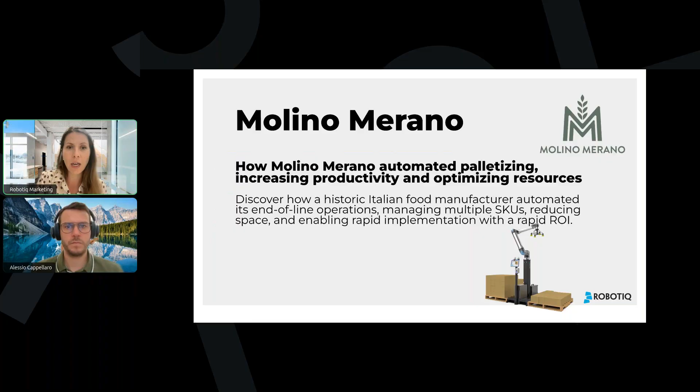Yeah. So ready, everyone? If we have Italians on the line, I would love a thumbs up as well. But if we have Italy lovers, it's also okay to share a thumbs up.

So let's travel to northern Italy, in the beautiful mountain region where this premium flour producer, Molino Merano, focuses on quality, tradition, and operational excellence. They're located in Merano in Trentino Alto Adige, a famous region in the north of Italy. It's a company founded in 1985, with year-round production, up to 200 employees and a large variety of products: cereals, flour, quinoa, polenta, many types of derivative products from flour.

So again, you might recognize yourself if your production line contains diverse SKUs, diverse types of boxes, diverse weights, and this is where they had a specific challenge. So Alessio, talk to us a little bit about how this project started and what was their main challenge. Yes, thank you very much, Eli, for the introduction. I met the customer Molino Merano during the exhibition last year at IPACK-IMA in May. We had a discussion during the show. They saw our palletizer and they explained to us their needs and their pain points.

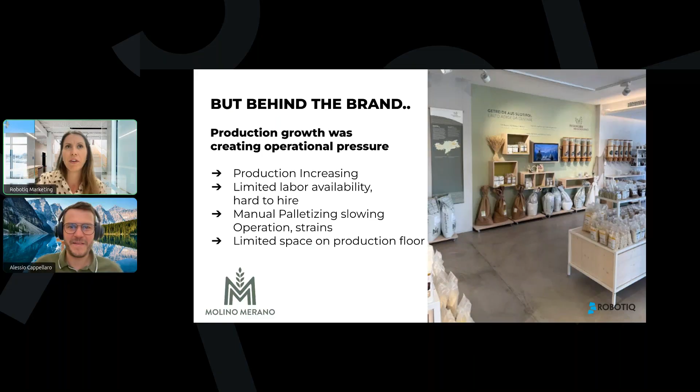Very good. Thanks, Alessio. Yeah, cool. And still a bit more about their team. Yeah.

Yes, correct. They needed a practical automation partner, because they had very clear in mind what they wanted to do. They wanted a fast solution and a fast deployment. So they didn't come to the exhibition with a long project, but they came with a focused idea. They knew what they wanted, and in particular they wanted something that was faster to develop, faster not only to install but also to develop all the projects together.

Something that was standard, but also easy and flexible to use, flexible for their space and easy to use for their operators that use it every day. And of course, since they are producing a lot and they are running multiple shifts for some part of the year, they wanted a very reliable solution that can last in time and that can bring added value to the company.

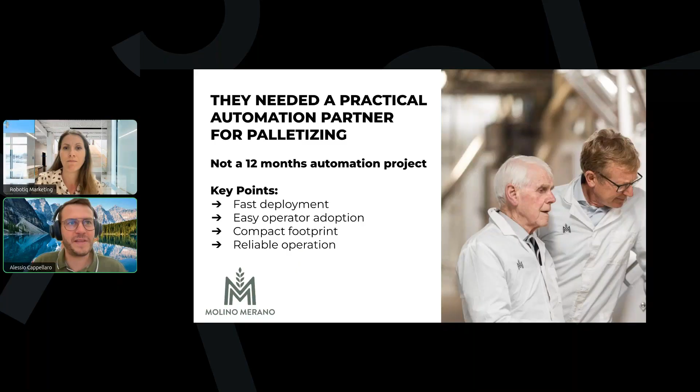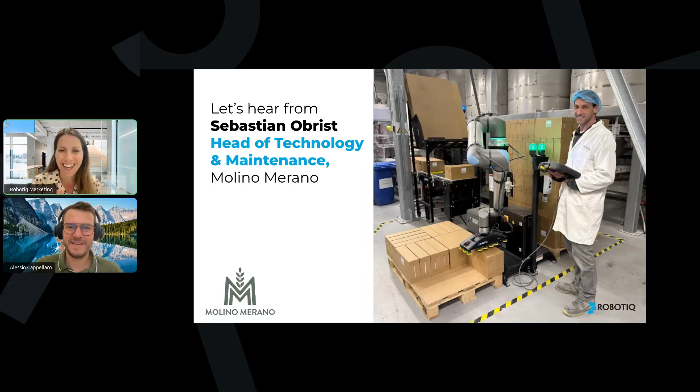Yes. Thanks, Alessio. I think quite some people can recognize themselves in this situation. So let's hear from Sebastian Obrist, head of technology and maintenance at Molino Merano. If anyone wants to practice their Italian in the next video, we have the subtitles in English, but you'll be able to hear a bit of the accent. So I wish you happy listening for a 2-minute interview.

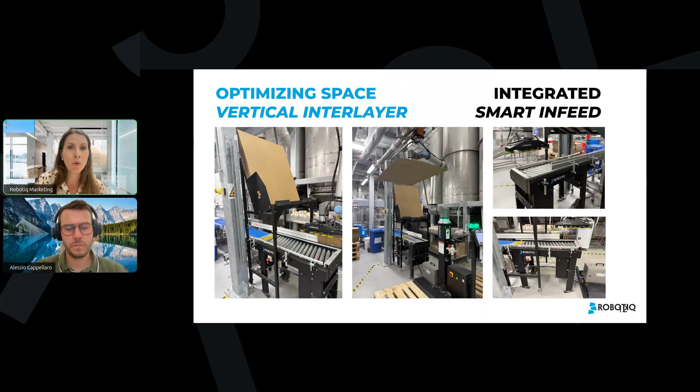So they are adding the Smart Infeed to their existing line, just a piece of smart conveyor. We call it Smart Infeed at Robotiq. But this piece of conveyor makes it way easier for you to manage different SKUs and new pallet patterns, new box types, making sure it's always easy for your team to program and reprogram it afterwards. Correct. Yes.

And another key result that we developed together with Molino is that we found a way to use collaborative mode 100%. As you probably saw in the video and can see in the picture, we are not putting any fences, and also no scanner in the palletizing cell. This means we are working 100% in collaborative mode, and while you are palletizing, you can change the pallet. As we can see here in the picture, we can palletize while the operator is changing the pallet.

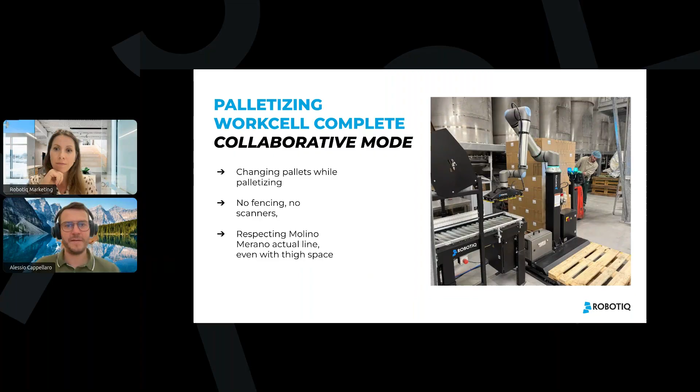This allows you to never stop production. Your palletizer is always working and is never stopped. And this allows Molino Merano to maintain high productivity, to maintain a very compact layout, and to work, as I mentioned before, in a collaborative way. Exactly. So very interesting, to be able to realize this in such a tight environment.

Yeah, and we are installing more and more collaborative solutions in Italy, but not only in Italy. This means that if we sit down together with the customer, we can use our standard palletizer and standard modules to find your solution, also if you need to go collaborative, if you need to change pallets while you are palletizing. And here, I think, is the most important slide, the early results.

We installed the palletizer, I think, 7 or 8 months ago, and we can see that they increased their production. They managed to use 100% of the productivity of the machine before the palletizer. They work in shifts, not always, but when they have peaks, like at Christmas or before summer, they need to produce more. This means they need to work in 2 shifts, and in the past they had to hire people from outside, from an external labor force.

And with this solution, they can prevent that, so they can have a faster ROI. And during the negotiation with Sebastian, we sat down together and found out that for Molino they will have an ROI that will be around 14 months. That is quite a good result for a company that works 1.5 shifts per day.

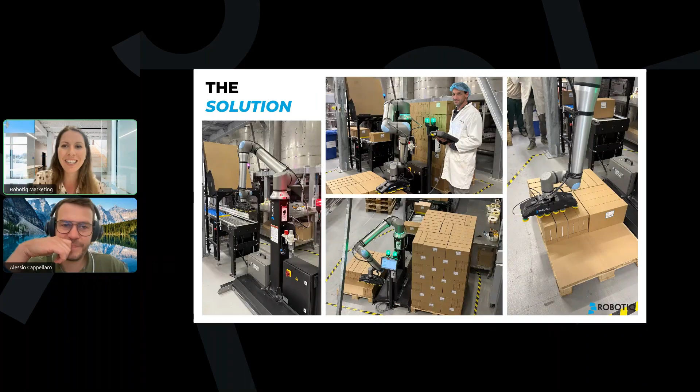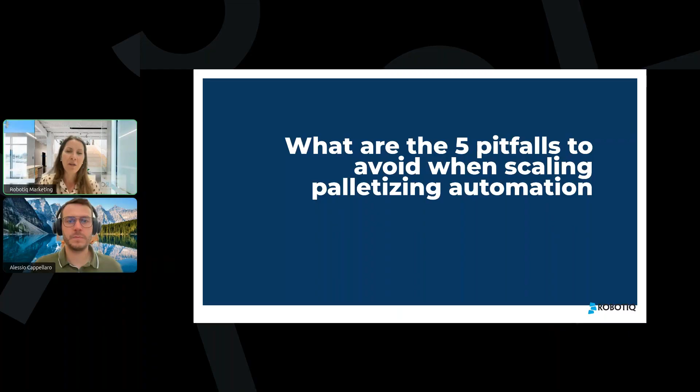Great. Thank you for sharing all about this project. You might have heard, everybody on the line, they say Italians do it better. Is it the case in palletizing, Alessio? So we're going to go over the 5 pitfalls to avoid when scaling palletizing automation related to the Molino Merano project. No, it's not only thanks to the Italians. Sorry, Alessio.

It's thanks to the close to 1,000 palletizing units installed in production worldwide, with more than 300 units just last year. So what can we learn from this? We see pictures of bottling, wine, food, consumer goods, pharma products. Mainly these 3 industries are our main focus where we've deployed all our skill set. We're going to go over these 5 pitfalls, and feel free to share in the chat if you have any other pitfall we should keep in mind.

So the first thing to avoid, of course, is to overestimate installation complexity. Some people will see an automation project with many months of deployment, many months of lead time, and a lot of investment. It's totally a myth. The reality is, in that case, the material arrives, it's installed in a day. The second day is the programming, and the third day is the training. And sometimes it can be done even on the second day. So we're talking about days if we have a standardized solution.

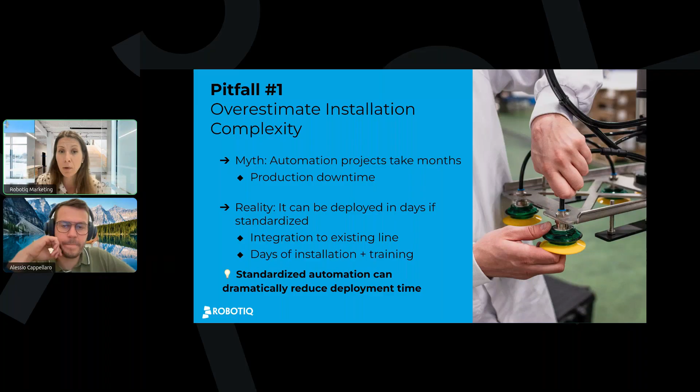That's really what we believe in at Robotiq. So integrated to the existing line, no change of your production floor. And of course, as I said, days of installation and training. So make sure you focus on a standardized automation that can dramatically reduce the deployment time. Next one, Alessio, up to you. Correct. Thank you, Eli.

So the pitfall number 2 that we identify is to design only with the perfect conditions. As we saw in the case study of Molino Merano, which we also see here in another very interesting picture, the real production environment is different than the computer world or the simulation. We have tight spaces, we have ceiling limits, we have beams, as here. We have layout constraints, we have existing equipment to respect, and other equipment to stay at a certain distance.

So it's not that the customer layout has to adapt to the palletizing solution, but the palletizing solution that has to adapt to the customer's space, availability and constraints. So we have to be able to adapt to real conditions, and we have to have hardware that is standard, but at the same time flexible, with software that can adapt to the space and constraints. Here we have, I think, a video coming up. If you click, Eli, thank you.

We can see here that we have a special feature of our software that allows you, if you have a column like we have here in Molino Merano, to put it in your layout, and automatically the algorithm will calculate the trajectory in order to avoid the column, as we can see in the video. The key is that the operator does not have to program the trajectory; you just have to draw your constraint, and the palletizer automatically calculates the robot trajectory.

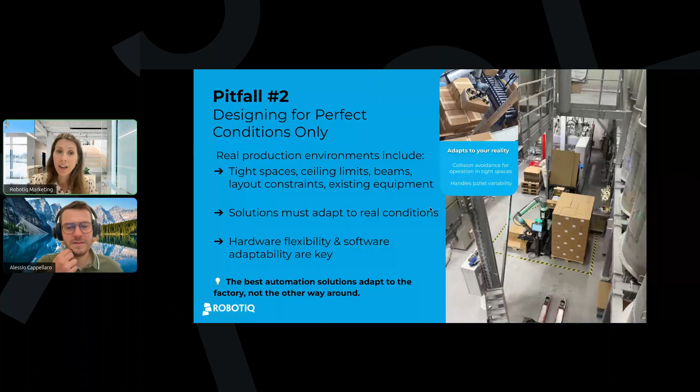Yeah. Exactly. Thanks, Alessio. Definitely. So nothing to teach point by point or have an external engineering team to plan the programming for you. It's all done automatically with the software. So that comes to our third pitfall, and makes a good link. Not planning for variability from the beginning can be a mistake.

So if you go with either a traditional solution or something very complex in training, you have to take that into consideration. Food manufacturers, but also other consumer goods manufacturers, pharma, you often produce multiple SKUs, multiple box sizes, new pallet patterns all the time. Just think of food manufacturers: at Christmas time, there are these new types of boxes. You have a new customer with specific requests for box shapes.

So you need to be able to do that, and you don't want to have to call your external team every time. You want your operators to be able to deploy this, and this is what a standardized and easy to use solution will provide you. So flexible programming allows you to plan for change from day one, as I said. Flexible automation helps manufacturers scale sustainably as production evolves.

We have customers, for example, I'm thinking about Cascade Coffee. Some people might have heard of them already. They have more than 400 SKUs, and it's changing all the time. Recently, they've opened up to the Asian market. They didn't have to talk to us about it. We discussed with them again recently, and they said, hey, we've just added 100 more SKUs. We're there to support the optimization, but it's all something you can do on your own.

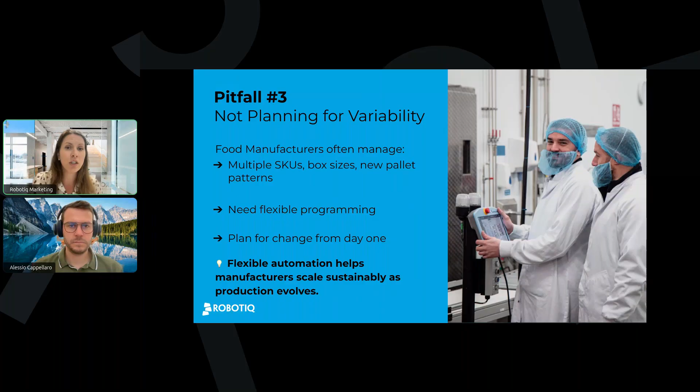Right, and yeah, flexibility, as you mentioned, Eli, but also it's very important to keep it simple. Sometimes customers that want to automate think that they have to automate the most complex task. But the key that we saw in our 950 installations is that it's better to start simple and then increase and scale.

And it's very important also not to overcomplicate things, and to start with the automation that has a clear and proven payback. So the ROI is very important, in particular for the customers, the owners of companies, they know it. And we've seen a lot of times installations with very expensive lines producing food or pharma, and then in the end, the palletizing is still manual and is the bottleneck. So sometimes automating the most simple operation, that is palletizing, is the key for a clear and efficient success, also in terms of ROI.

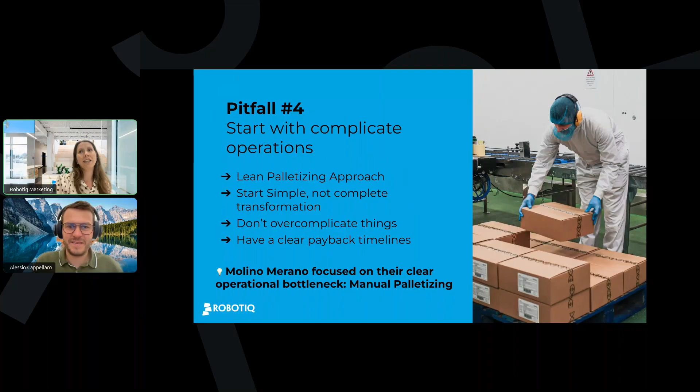So again, the last pitfall to avoid: choosing an overly complex solution. Automation should be simple, and that's our way to do it. Alessio is going to talk about the lean robotics approach here at Robotiq. That's what we follow every day. Over-customization slows deployment. Complex systems are harder to maintain. So focusing on scalability here is important: having a standard solution that delivers fast value, focusing on simplicity and reliability from day to day.

And this last point for me is important, and that's what we hear the most: the operators are owning the solution. So we see here a project, I've already talked about it, so I know some people on the line are there every webinar. We talked about this project called Pan Voila. They are a bread and cake manufacturer, and it was very interesting.

I've been there on site to film and photograph the case study, and the owner was like, usually it takes me 3 months to deploy a new automation project, and I have to train the people every week until after the 3 months they're up to speed. In that case, 2 weeks later, it was the operators that were teaching me how to bring in the new SKU, implement the new box size, whatsoever. So they were learning very fast and owning the solution after just a couple of days. So ease of use and reliability create more value than customization.

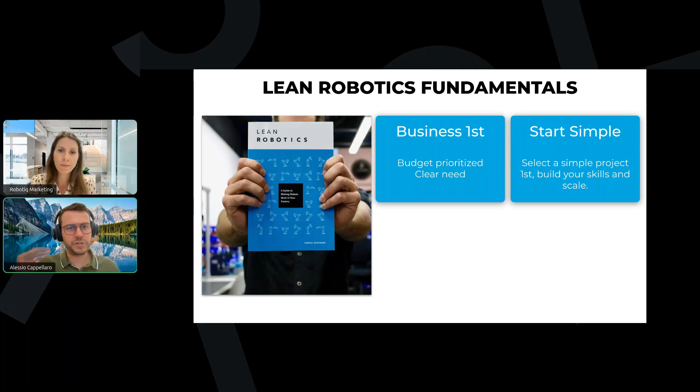Where do we start? So yes, we have a great experience that we call the Lean Palletizing experience, and we have a book written by our CEO Samuel with the fundamentals of Lean Robotics. So first, it's very important to identify the business case. We mentioned the ROI a lot of times. We need to sit down with the customer and make sure the project will bring a clear return on investment. We start simple. As we mentioned in the Molino Merano case, select a simple project first, build your skills, and then scale. So start simple and then grow in complexity.

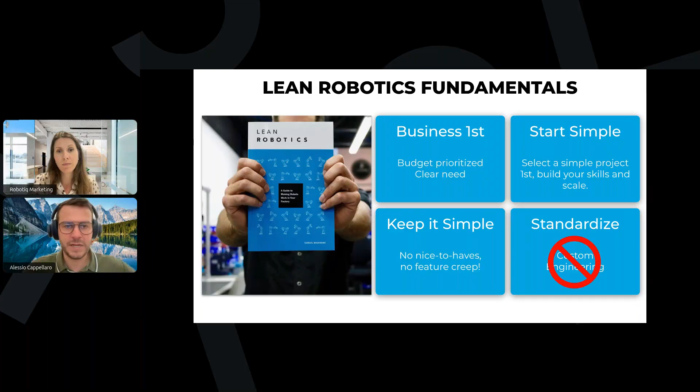Then the third fundamental is start simple, but also keep it simple. So we want you to take advantage of our palletizer as fast as possible. We want a fast installation, and we want you to take the benefit of it starting from the first day of the installation. And don't focus on custom engineering, but make it standard. I think one of the strengths of Robotiq is that we standardized a product that was custom before; now it is standard. So when we also have to adapt to difficult customer conditions, we always use our standard modules.

In the slide that Elizabeth is showing here, we can see how we can support the customer in all his journey, from the selection of the right palletizer till the installation and then the scale. Let's have a look at how we can do that.

We have a very great tool called Fit Check that allows you to check which is the best solution for you. Is your application compatible with our palletizer? Which is the best palletizer solution and option that we can offer to you? With this software, you are guided from the beginning to the end to have a clear answer, also in terms of ROI. So from the first step, then we can simulate together with you.

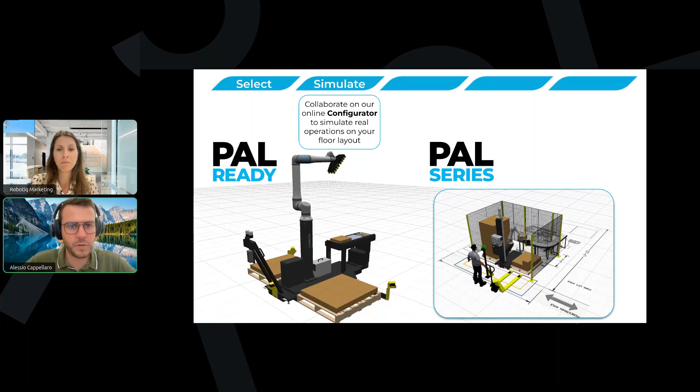We have, in my opinion, a very good and advanced software that allows you to put your layout, your footprint, some constraints, and from the first moment you have an idea of what your production rate will be, what your space will be, so you can do all these considerations and pre-analysis with a very simple software, starting from the first moment you are evaluating the palletizer.

Of course, Robotiq is a worldwide company, and we have support all around the world. We have partners covering all of our territories in Italy, Spain, but also in all of Europe, America and Asia Pacific. You can contact one of our partner experts and see our palletizer in their facility.

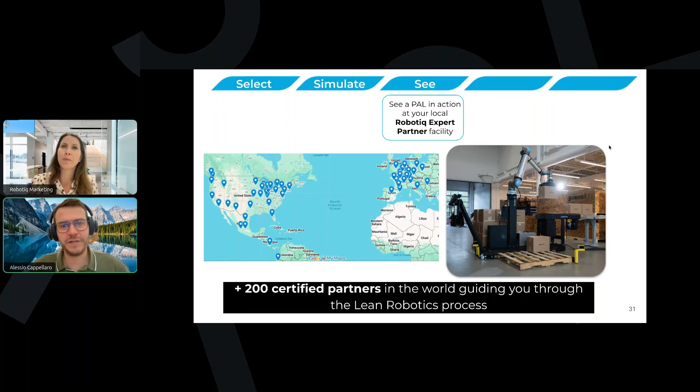Then, of course, we support you not only to install, but to install and train your operators and start to work with our palletizer, and we make you able to scale. Since it is a standard solution, it is easy to scale and to deploy in all the lines that you have available, with the focus to maintain a high ROI and a flexible and adaptable solution.

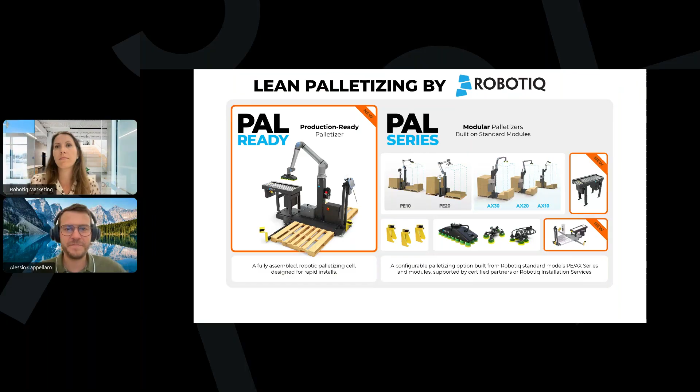As we saw before, the software is very easy to use, and it is also very easy to switch from one program to another. We have two different product lines. The first one is the PAL Ready, and as the name says, it is a palletizer ready for production. It's standard, ready to be connected to your production line. And then we have the PAL series: when you have specific needs, we can combine our standard modules together to create the perfect solution for your needs. I think we have a good video now to see our Ready and how fast and easy it is to install.

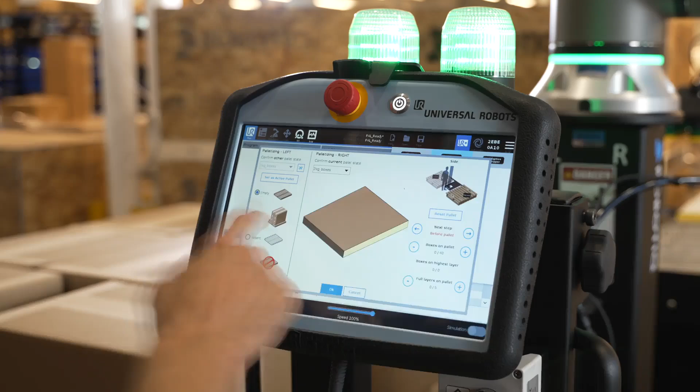Very good. Yeah. Sorry for the sound. We know it's a little heavy. We cannot control the sound that is going out. Sorry for that. But yeah, thank you.

And here we saw how easy to install and how standard our palletizer is, but at the same time how flexible and how easy to program it is. So I think it's a very good video to show you all what Robotiq can offer in terms of palletizers.

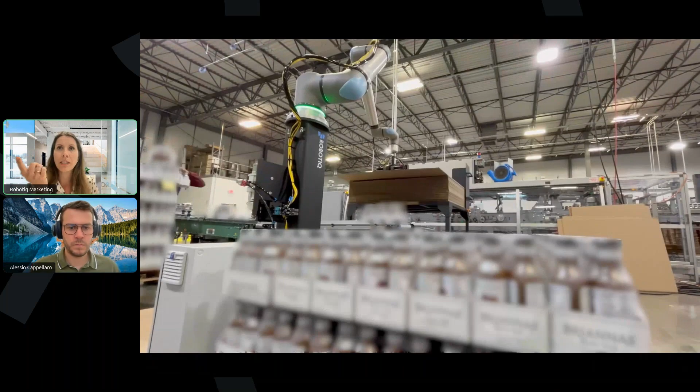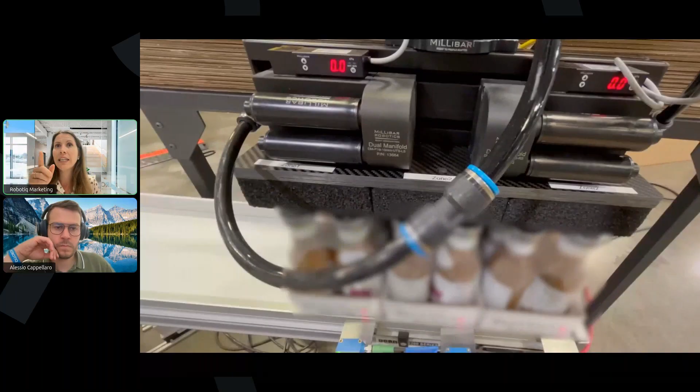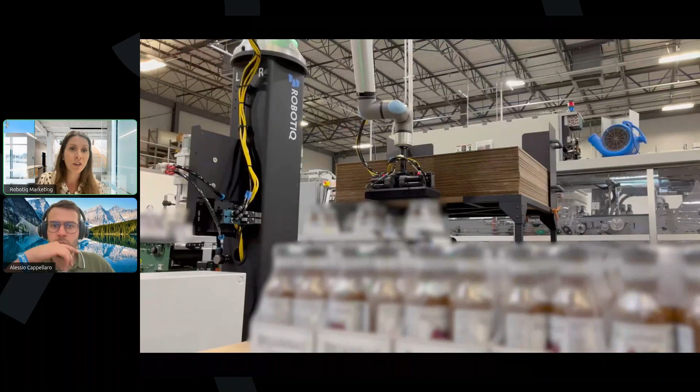So interlayer is involved. And yes, Russell, the question was 3 picks per minute, 3 picks at a time for that case. So you see here we have a custom foam gripper that was designed by our team to ensure that we are reaching the cycle time that the customer needed. So yes, multi-pick is possible, whether with our standard solution or with our custom gripping system. Anything to add, Alessio? I think you make it very clear.

We have a lot of installations of multi-pick, in particular also in the coffee world, when you are working with coffee cups that are very light boxes, and we can double pick and eventually also triple pick to use this collaborative palletizer also in very fast lines. Exactly. Thank you, Alessio.

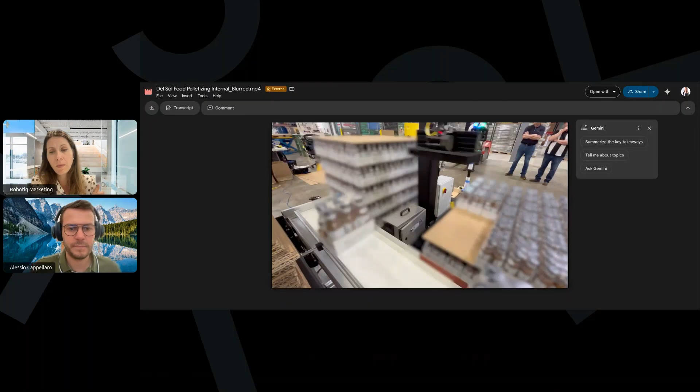And Max, I'm coming to your question. It's true that I forgot the second part of your question. So can it be trained to unload a pallet onto a conveyor belt? Do you want to take that one, Alessio? So I guess that would be depalletizing. Yes, the answer is yes. We can do that. We did that. Maybe we have some video, but yes, the key here is

Definitely, and sometimes we have customers that, for example, have American pallets but want to sell to Europe, or they receive European pallets but want to repalletize. So they take the European pallet, they depalletize it on the conveyor, and the palletizer will repalletize on an American pallet, for example. So this is completely doable with the software.

I appreciate all of your questions. We're continuing on the questions. So as I promised, Andrew, we're going over a video here. It's available on YouTube, but also on our platforms. So this is a video of how to program a new SKU, programming a complete new recipe. It's our technical team who prepared this video, so you can see a bit the interface here.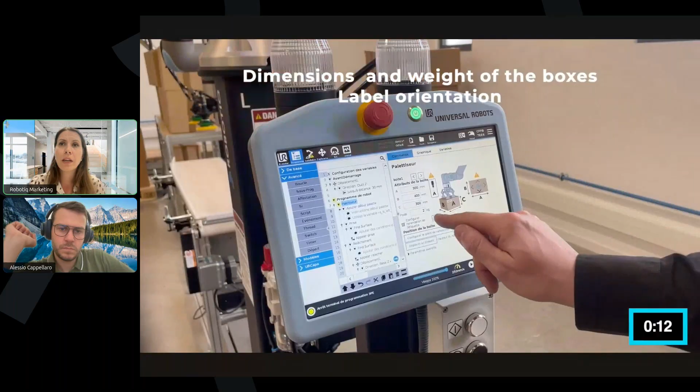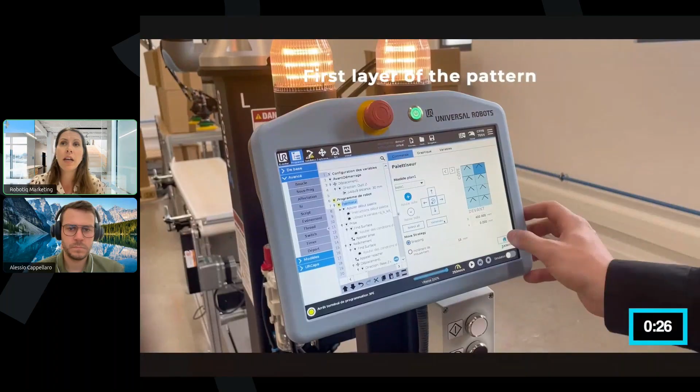So changing box sizes, label orientation, whether the pallet is left or right, what's the model, so you can easily import your pallet pattern beforehand and select them afterwards in the program. If you need any modifications, very intuitive, very simple.

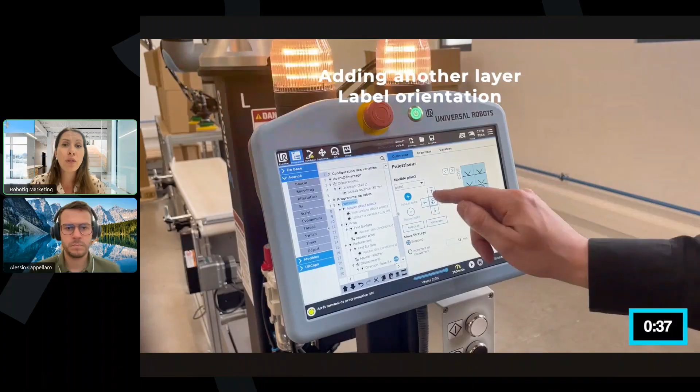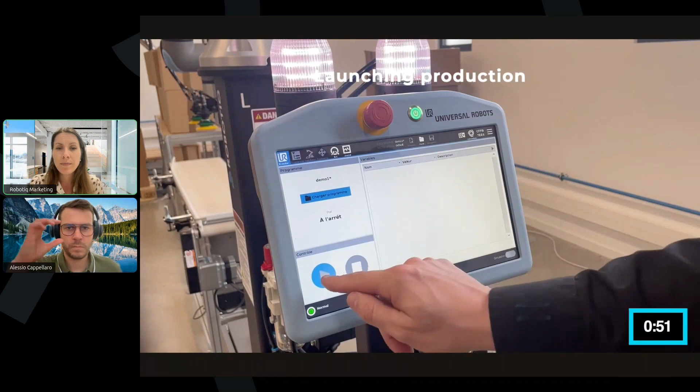If you have the 3D TOPS files, it's also possible to import your TOPS files, and there are 2 or 3 other pallet configurator software that we are also integrated with. Starting the program, you confirm the state of the pallet. Is it empty or is there already a layer on it? And then the boxes are coming and we're working towards the new pallet pattern. Okay.

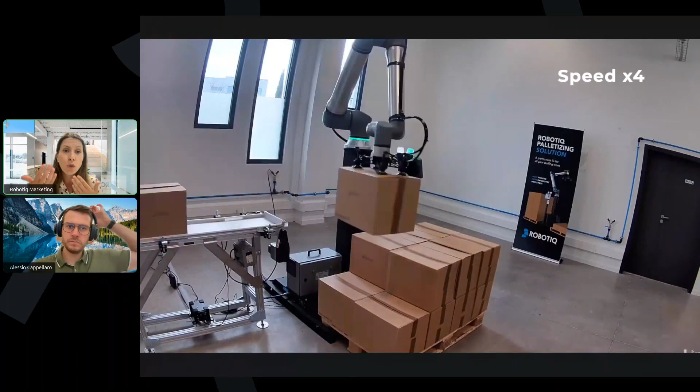Good question from Thomas. Maybe Alessio, you have a word about that. So what parts of the system require the most maintenance? So that's something that surprised the customer a lot. If you want to confirm any detail about that, Alessio.

Yeah, normally they say that we don't have standard maintenance, and in particular, we don't need preventive maintenance. The UR robot is famous for being very reliable over time and not requiring any kind of maintenance. Also, our software calculates the trajectory in a way that we damage the joints of the robot as little as possible. So the palletizer itself does not need maintenance. The smart feed, the same.

We have to do some maintenance maybe on the vacuum cups, in particular when you have a lot of powder in your plant. We have a lot of tea and coffee customers, and sometimes they change the vacuum cups once per year or once every 18 months. But it's quite a commercial material that you can buy from us, or you can find in shops in your country. Exactly.

So there was another question. I think I've answered it in the chat, Thomas. I hope it answered. But the other question I think was coming from Axel. Yes, thanks Axel for the questions. So do we have a dust protection system in our vacuum? So it really happens a lot. As Alessio said, we have a lot of flour environments when we work with bakeries, and they just change the suction cup once in a while.